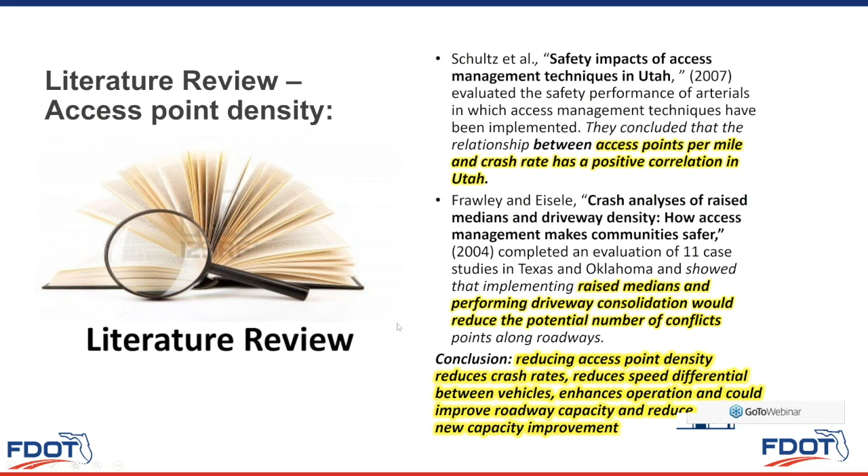Just want to show a couple of highlights. This is very wordy, but I'm just going to talk about the conclusion. If you reduce access point density, you will likely reduce the amount of crashes you have and also improve operations. And this is from the literature. So there's been a number of studies, including Florida. There's an NCHRP project that identified that of driveway crashes, about 70% of them are left turns. There you go. Raised medians reduce crash frequency and severity, and also improve traffic operations.

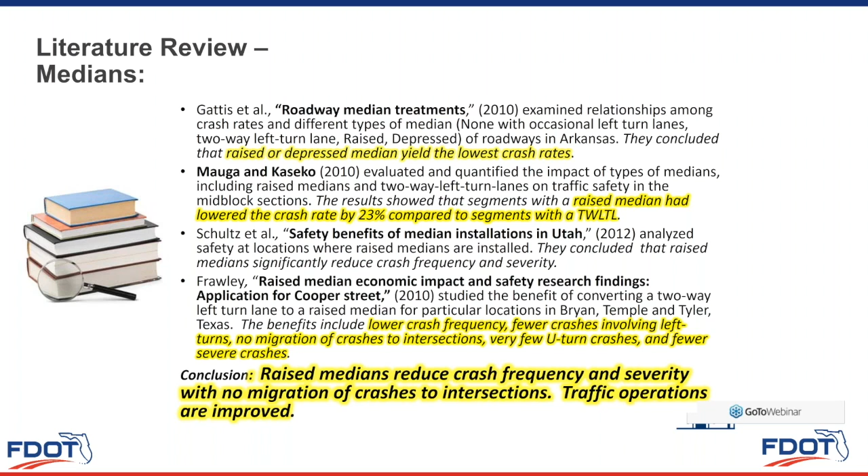There's this myth about economic impacts because of raised medians, and so we hired Mythbusters to take a look at this, and studies have shown that perceptions typically appear worse than reality. I think those types of businesses that have a lot more passerby trips may be affected more than those that have direct generation. And so, in general, though, this myth is busted. And in some cases, after a good streetscape project that includes medians, you might get more economic activity.

I want to talk about data collection. Actually, before I do this, I was going to pause my screen, but I'm just going to jump away, and I want to show you something. The presentation I've been showing you was from last year. I also gave a presentation this year, and I just wanted to very briefly show you a few things from it. Because Gary was mentioning that there might be some interest, it looks at right-in, right-out driveways, and specifically compliance issues. And we did a case study.

I'm skipping a bunch of slides, but we did a case study at a brand new Bojangles in Anderson, South Carolina. It all started when I went to the doctor's to get a mole removed, and I was sitting in the parking lot watching the activity in the brand new Bojangles next door, and I was amazed at the number of noncompliant or illegal maneuvers into and out of this driveway, which is supposed to be a right-in, right-out driveway. And this is the right-in, right-out driveway I'm talking about right here.

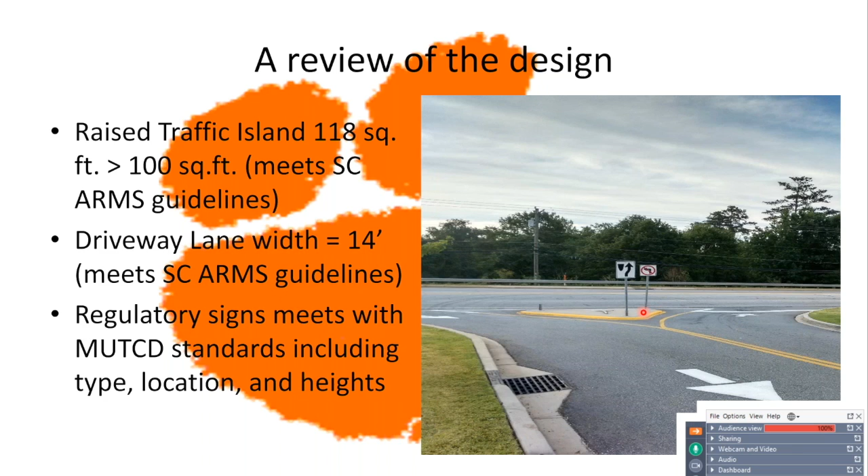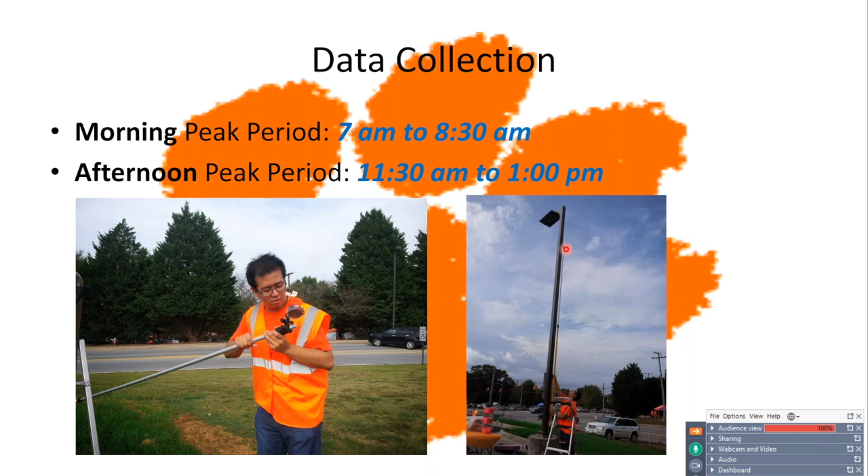And so we did some data collection, and we used these small action cameras, and this is actually a telescoping paint pole that we bought at Lowe's. And we put it up, and you could pan it simply by twisting it. And we use Wi-Fi to be able to see what it's recording. We use this to collect data.

Whoopsie, the pointer. Hold on. Oh, shoot.

Just want to briefly show the maneuvers. There's a left turn maneuver, a right turn maneuver. So I talked to a friend at the DOT in Access Management, and I said, hey, I'd like to do a before and after study if we put in longitudinal barrier, bollards basically, at this intersection. Would you help me with this? And he said sure.

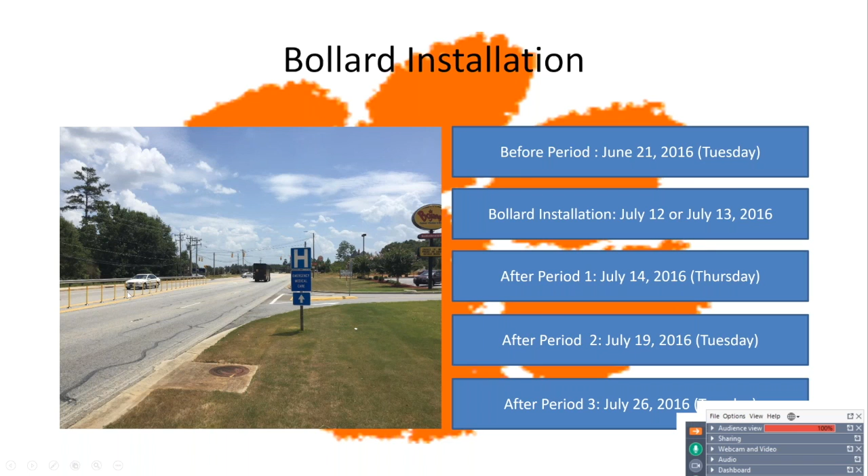And so we did the before study, and then the DOT installed bollards, and then we did three days of after data collection. And so here's our bollards. This is a very simple configuration here. I know down in Florida, I think a Qwick Kurb is popular in many locations. This is a cheaper system, but these ones are easily knocked away.

But what we saw was before the bollards were installed, we had nearly 20% non-compliance, and it reduced quite a bit after the bollards were installed. This is in a morning peak period. We also did a lunchtime peak, and again we found very similar results. We got inbound 20% non-compliance that went down a lot afterwards.

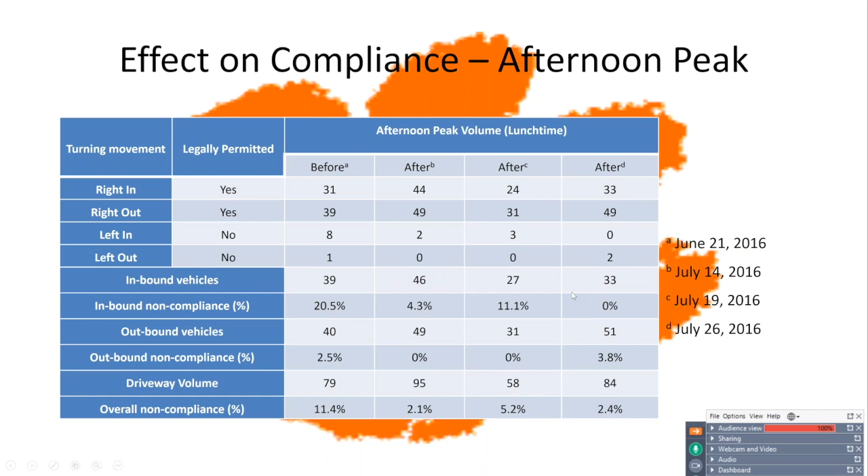We were interested in total volumes too. That's why we collected data at both driveways, and we saw that there was very little volume impact, and actually volume, for the most part, went up a few. It depends on the day of the week. And so from an economic impact, when considering just volumes, there was really no difference.

We did have some illegal maneuvers afterwards. This was considered an illegal maneuver: U-turn across the double yellow. And then we had three-point turns. We've had other things too, like vehicles traveling the wrong way here to make the left turn in. Not recommended. So I just wanted to quickly show you this study, and there's all sorts of data associated with this that we presented at TRB this year.

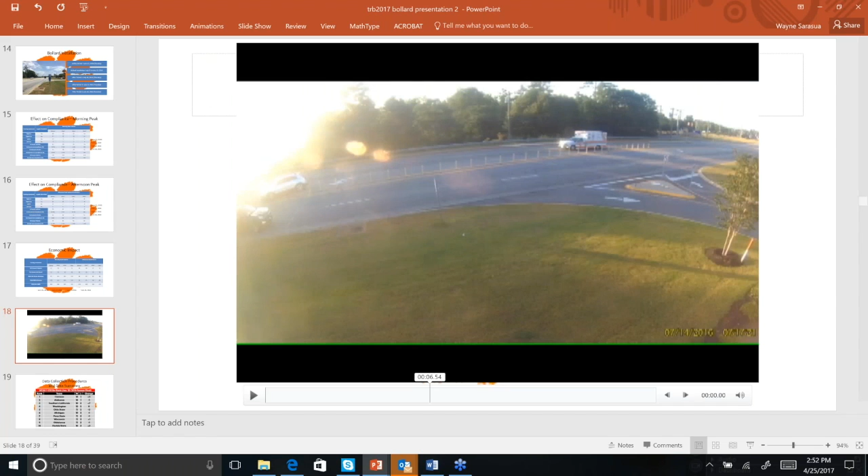I want to go back now to what we were doing on this other study, which has some related slides. Oopsie.

So we collected data along several corridors, 30 corridors in fact. We identified the corridors with the highest driveway crash rate according to a junction type driveway in the crash reports here in South Carolina. And so we identified 30 of them, and then I want to talk a little bit about crashes, the way we've collected crashes.

Once upon a time, we used distance to intersection, and then we migrated to a GPS system, that was used for a number of years and is still used by many jurisdictions, but no longer by the Highway Patrol. The way it worked was officers would use the handheld GPS, get coordinates, and then transfer the coordinate data to the crash reports. But officers had a lot of different problems with the GPS, and so many South Carolina crashes occur in the Atlantic Ocean, North Carolina, probably some in Florida, and other points unknown.

The new system was transitioned back in 2010, actually mostly 2011, and most of the Highway Patrol in the state had it by 2012. It's a GIS-based system. The officer can look on a GIS map to see where he or she is. The GPS will show where the officer is, and then the officer can pinpoint the location on the map by clicking.

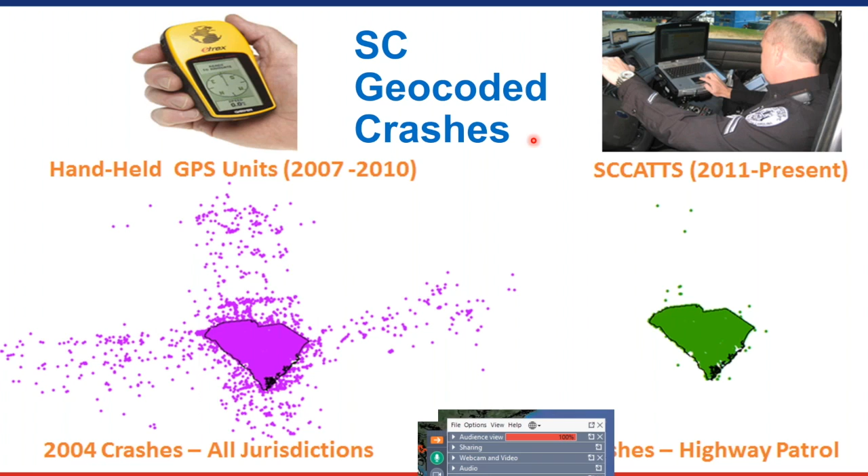Just a couple of things about the problems with handheld GPS data that I wanted to add. There's a lot of systematic issues. Officers would transpose longitude and latitude. The city of Greenville decided to change their GPSs to state plane coordinates without telling anybody, and so all their crashes were in state plane coordinates. And again, it goes in the same database, so we had to geocode theirs separately.

And then other jurisdictions had their GPSs in decimal degrees, while others had degrees, minutes, and seconds. And it's very tough to know which one is which, because in the database it just goes in as multiple digits, 6 digits for degrees, minutes, and seconds. Any number greater than 6 in the ones and the hundredths place, we know would be decimal degrees. But it was very difficult. You really had to use that data along with intersection locations to geocode them accurately. And you can see there's a number of other systematic errors that we had with the GPS handheld.

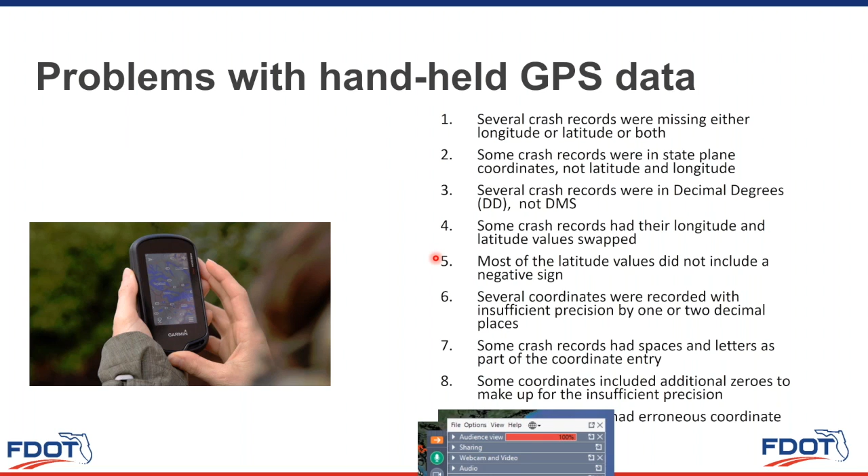Percent geocoded by year, and the data actually did not improve very much. We told the DOT all about this back in 2007. We wrote a paper that was presented at TRB in 2008, and the word just did not spread real well, and so many of the systematic errors continued until the implementation of the new system.

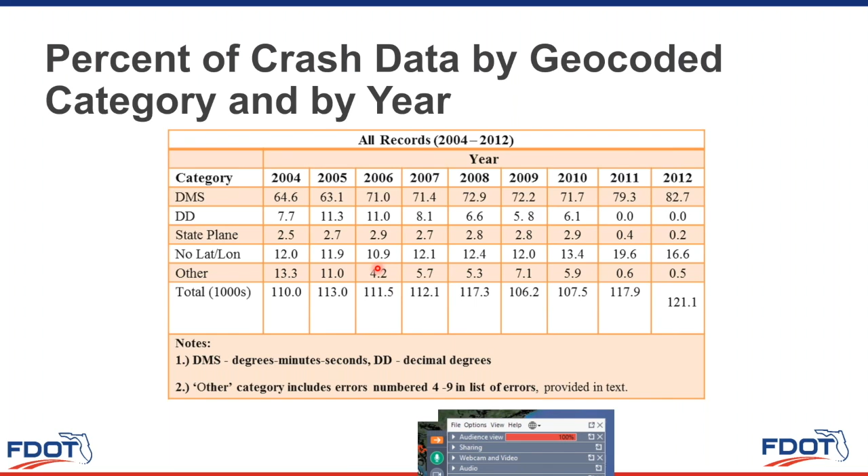Here, showing on the left, this is a busy corridor in Greenville, South Carolina, which is the closest big city to where I live. And here it shows that many of the crashes, now these crashes have been geocoded correctly. In other words, the officer would write down the correct coordinates. But even such, many of the crashes appear in parking lots and such, where officers would actually be filling out the report rather than on the road itself.

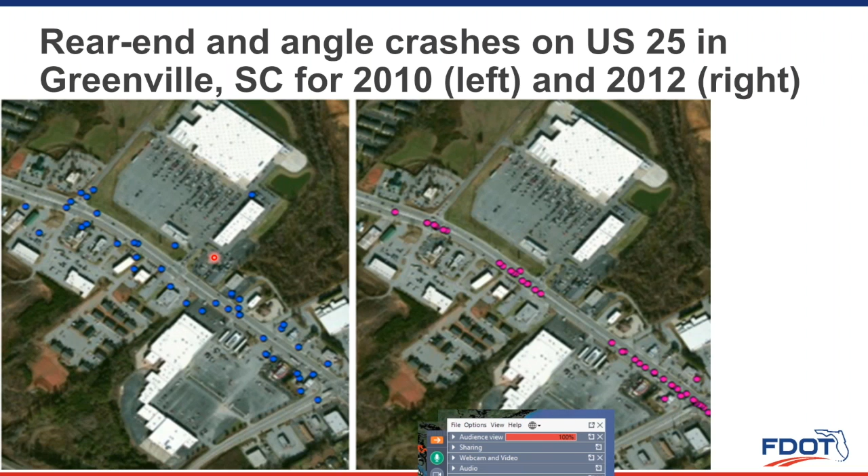On the right-hand side, here's the new system with the officers actually trying to pinpoint the location, and you can see the clusters, so this is great for statewide type screening, cluster analysis, whereas on the left-hand side, it's very, very random. I just want to show you a couple of other slides. On the left-hand side, there appears to be very few crashes in the road, and that's 2010 data. 2012 data, it's not that there's more crashes, it's just there's less crashes in parking lots and such.

This is US 17 in Berkeley. Again, you can see that we had many crashes appear in the parking lots, just much safer for the officers when they're filling out their reports to not be in the highway. And then they don't want to walk out there when they're collecting the GPS coordinates.

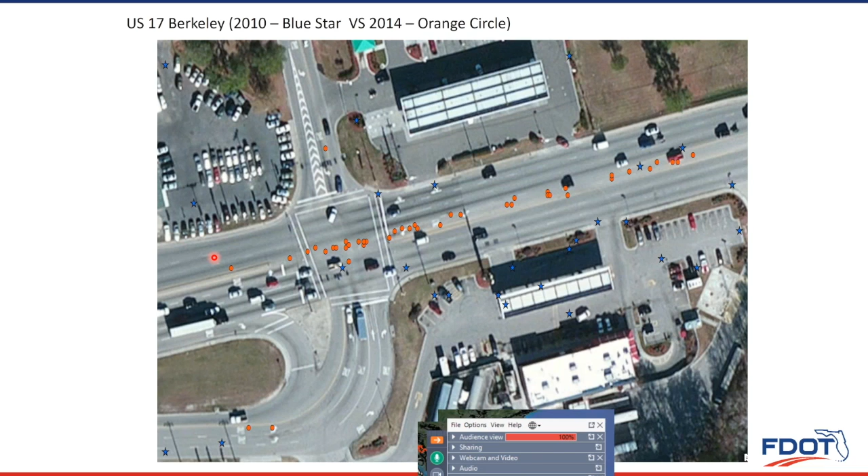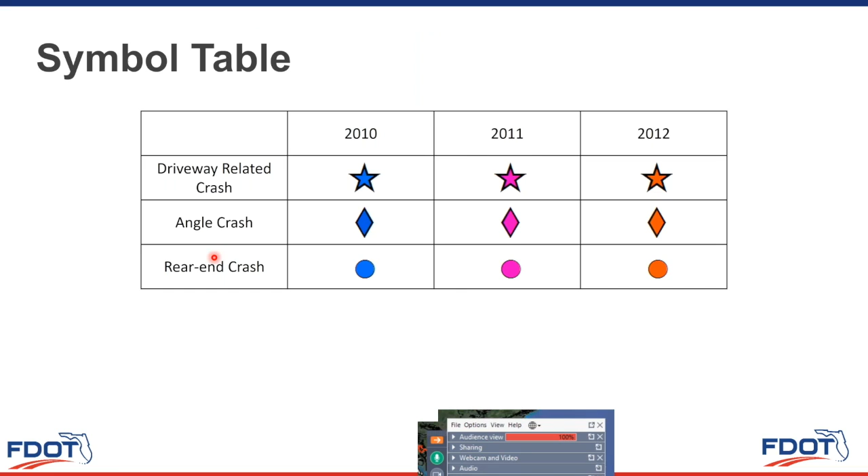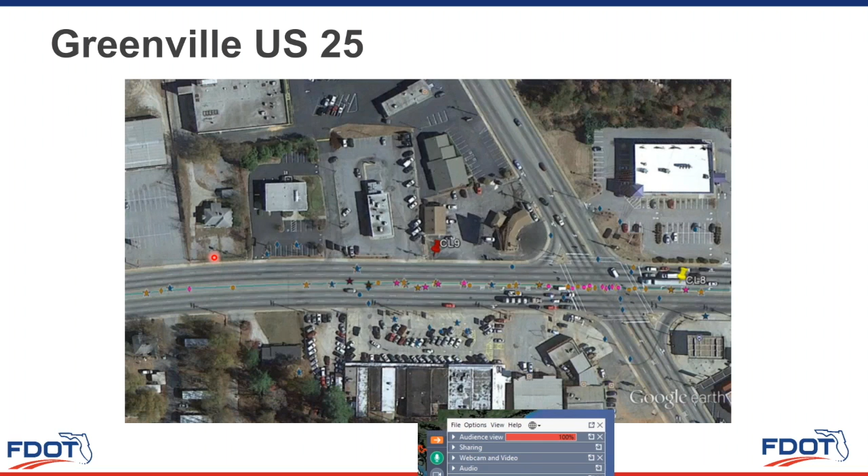I want to take a closer look at some data around the state. So some symbology here: 2010 is in blue, 11 is in magenta, and 12 is in Clemson orange. In Greenville, US 25 again. Just want to show, looking at crashes, we have a lot of crashes that occur next to left turn bays where we don't have really good corner clearance, and so a lot of vehicles are turning across the left turn bays into driveways.

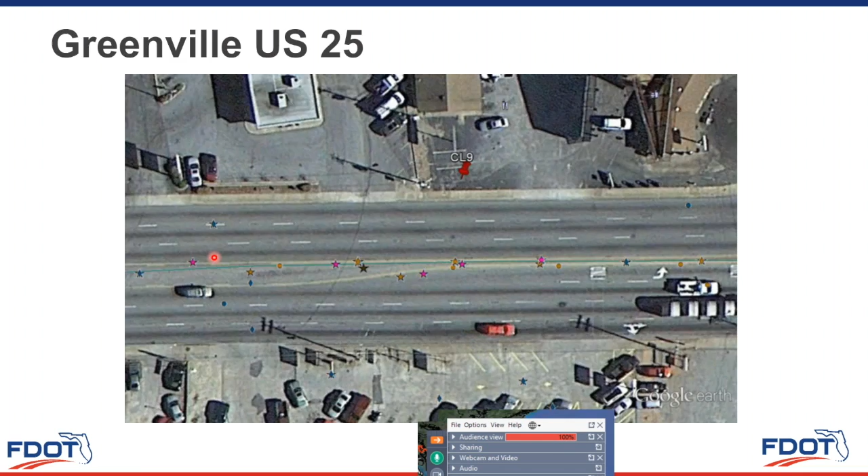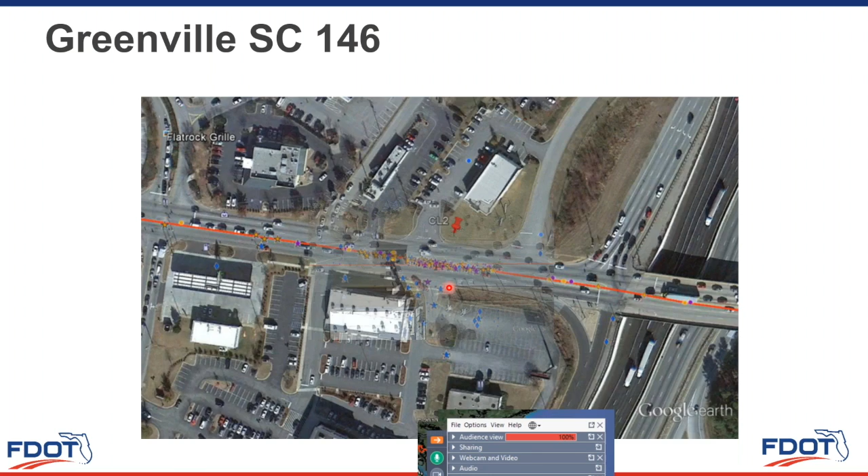Greenville, South Carolina 146. This is Woodruff Road, and this right here is Hell's Kitchen. This is 385 near Greenville. This is kind of a shortcut to 26 that goes to Columbia. And you see here, we just have a whole cluster of driveways with poor corner clearance, very close to the ramp here, and we just have a tremendous amount of crashes. And just kind of a zoom in. Again, this is only 11 and 12 data here, and 10 data is again in the parking lots.

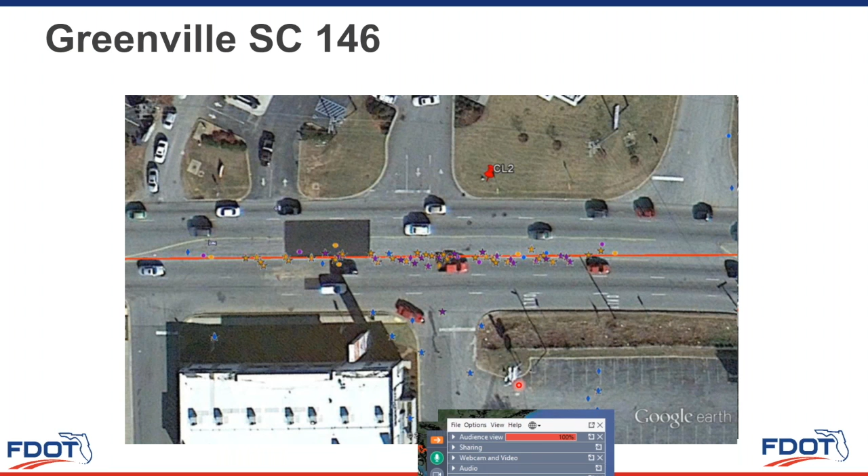Just moving down the road from this, where we go into a shared driveway and an intersection, the crashes just seem to disappear. Again, much better corner clearance, and a busy signalized intersection, but much fewer crashes. And the crashes I'm showing here are a number of different junction types, including different crash types, not just driveway junction types.

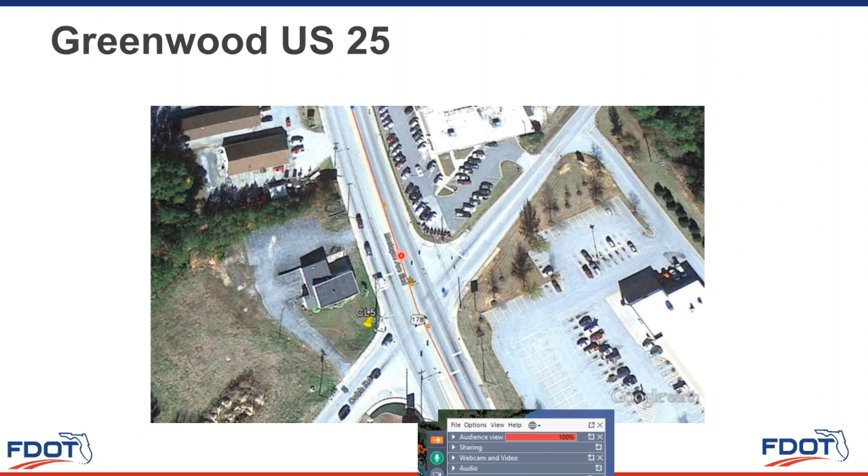Greenwood, US 25. It just kind of jumped out at me that we had 2012 crash data, but not 11 and 10. I was wondering why. And taking a closer look, they recently built a Dollar General where maybe the corner clearance might not be the best.

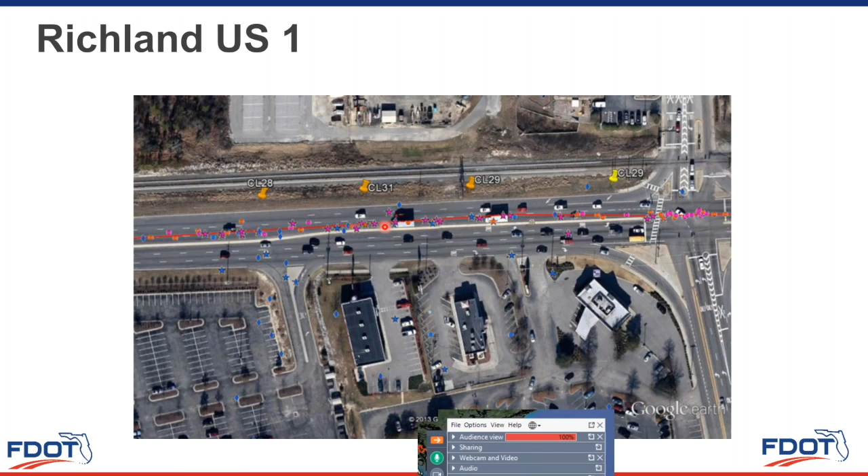Richland, US 1. If you take a look here, you'll see very little orange, and so much fewer 2012 crashes. And it just so happens that in the end of November, I believe, of 2011, they added a median. They did a before and after, and they created this collision diagram. By zooming in here, you can see crash type. We have 1 here, and we have 3 here. So these are angle left turns into the driveways. And see, there's so many of them, they're not even putting them on the sheet.

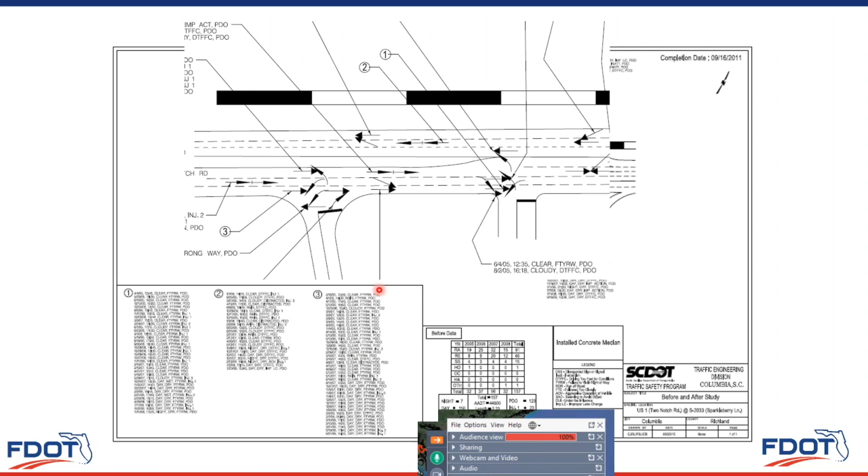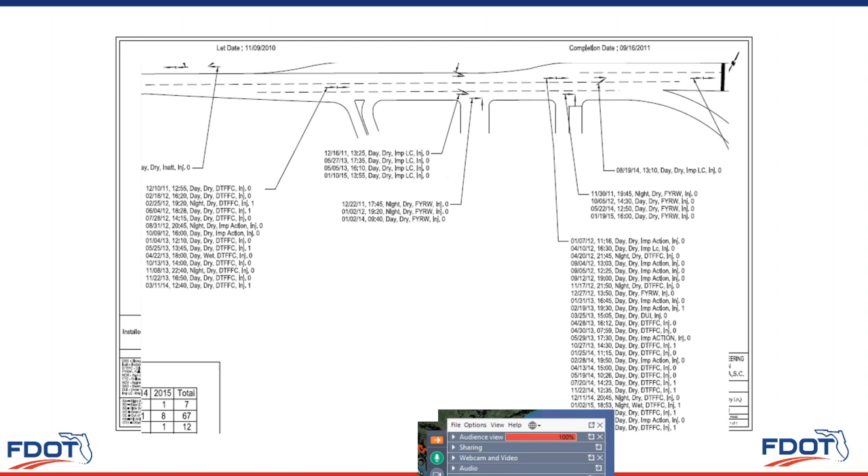This is the after scenario. And we have a lot more rear end crashes, but very few or none, close to 0, angle crashes after this. And so here's our before data on the left. This is a 4-year period. And the after data, roughly a 4-year period also. And the numbers almost cut in half. And the types of crashes, very few angled. There appears to be more rear end crashes now than there were before. But overall, fewer injuries and definitely enhanced safety.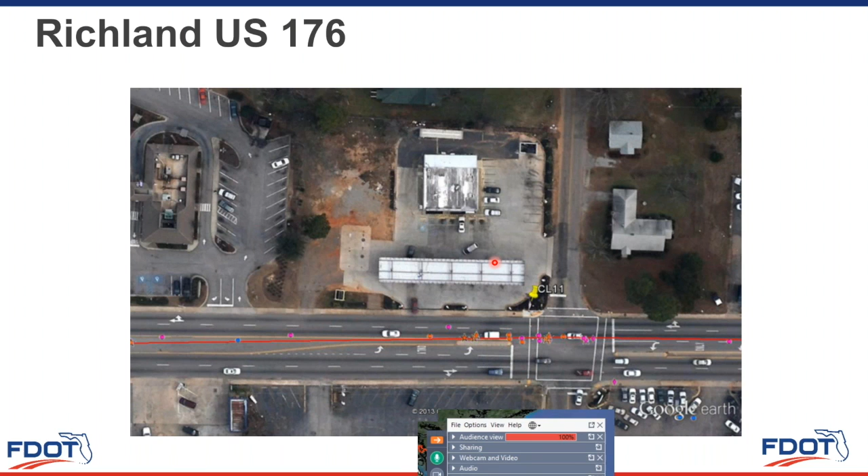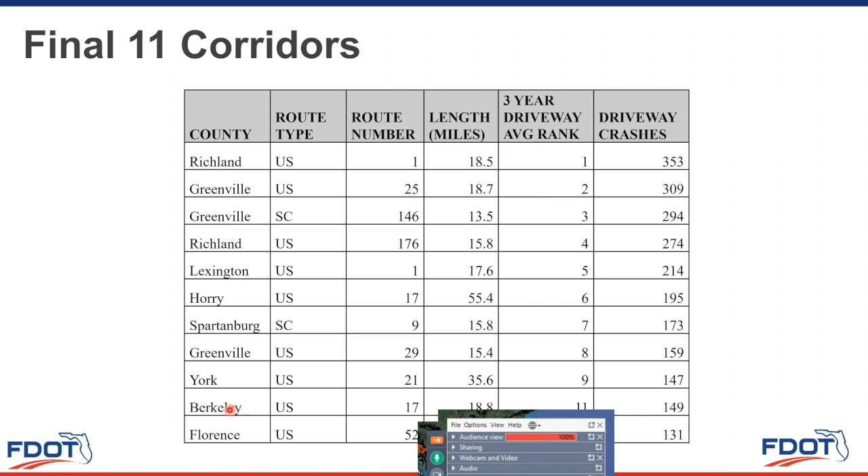So from those 30, we actually selected 11 from around the state for further analysis. And the 11 are most of the top ranked. We substituted a few to give us better spatial resolution. And so we added, but they're all in the top 14 or so. And these are the top 14 corridors with the most driveway crashes in the state.

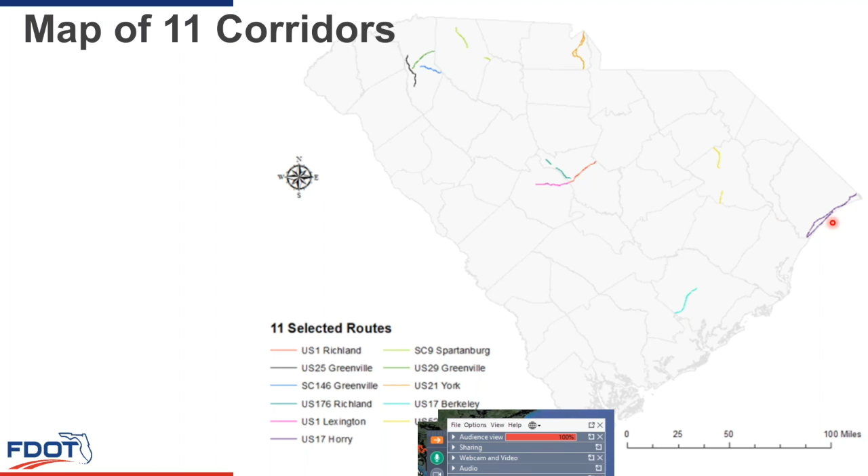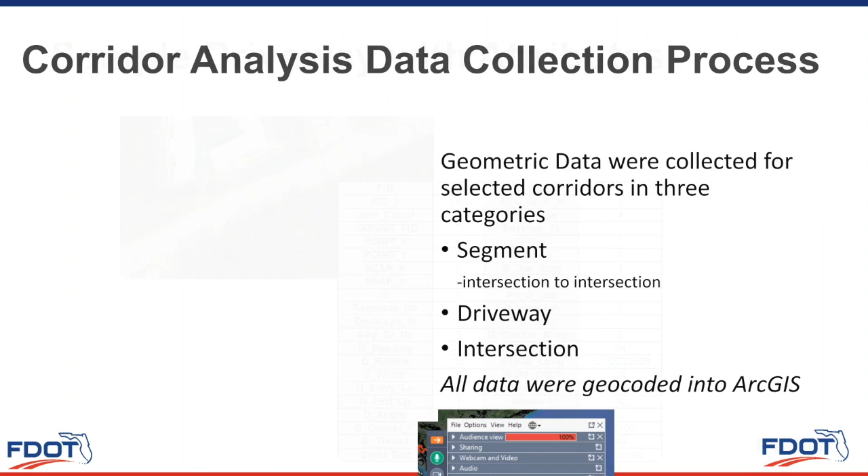So we collected data. Actually, a lot of the data came from our road characteristics file called RIMS here in South Carolina. Segment data, driveway. We don't really have much driveway information, very little, but we do have some intersection information, or at least the intersection locations. We also, though, created a driveway database because, again, what we're talking about is crashes associated with driveways, or what our purpose is in this study.

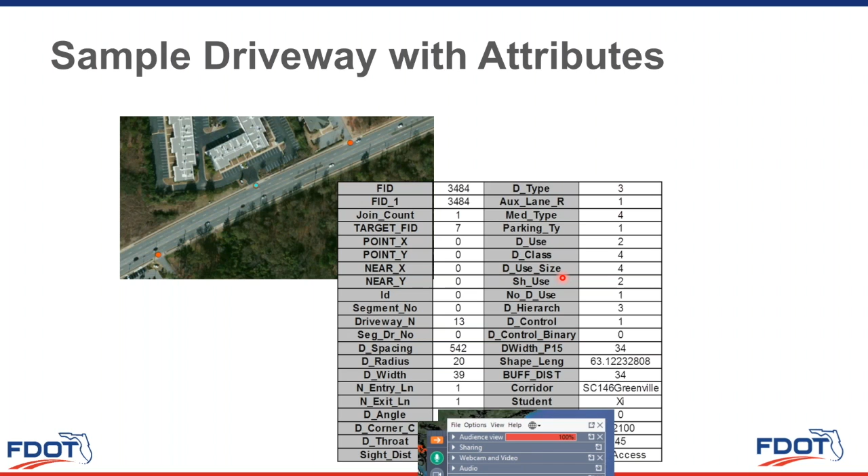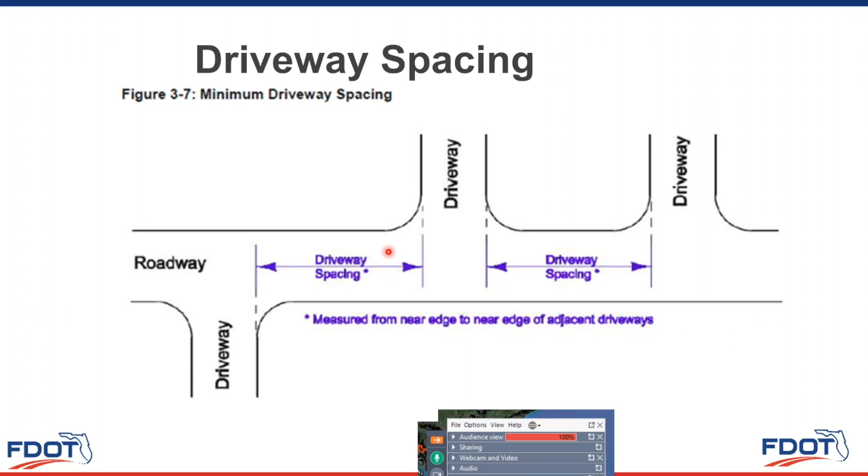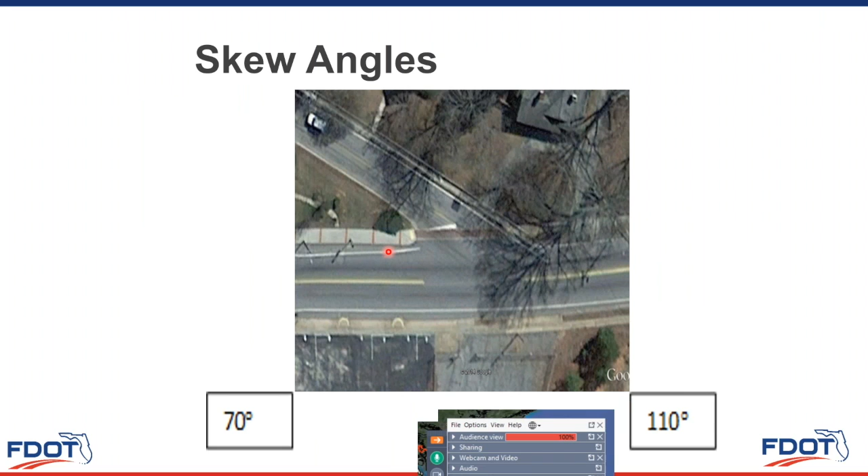So we collected all sorts of attributes. I hired a bunch of students from high school and some undergraduates a few summers ago to populate the databases. We gave them cheat sheets showing, okay, here's how you measure driveway spacing. And everything was done with Bing Maps, Google Earth Maps, and also Street View. And we populated this database, and we had a database of about 8,000 driveways along these corridors. We had, again, cheat sheets showing them what the skew angle was. Then after collecting all this data, we did safety analysis.

And so one of the things that we wanted to do was associate crashes with driveways. Now, I know you all down there probably have junction type as well. And we do have in our crash reports a junction type that is driveway. However, it's very clear that the officers were not necessarily populating this field the same. And in many cases, they omitted populating it altogether. And so there were probably a number of driveway crashes, in fact we were sure of it, that were omitted. So we included the driveway crashes, but also we included your rear end crashes, your angle crashes, your head-on. We removed basically fixed object crashes and single vehicle crashes from the analysis.

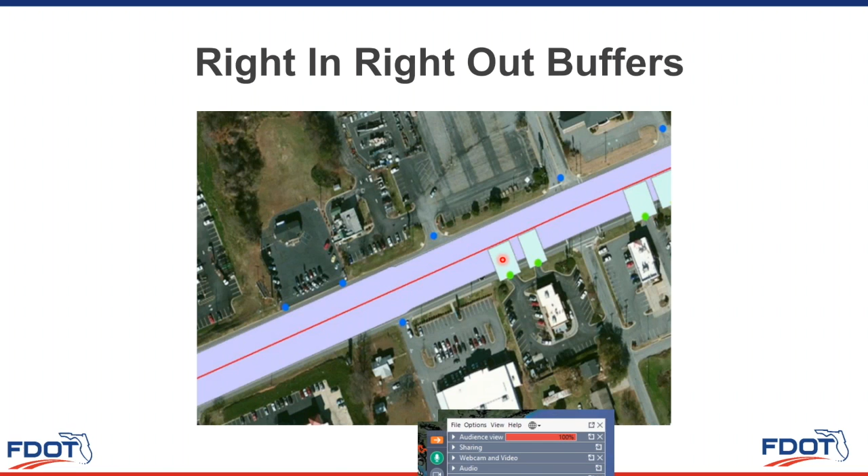Then what we did was we created buffers. What we have here in South Carolina is a center line, but we do not have a buffer for the pavement. So we created one using the RIMS data, which has travelway distance. And we used a GIS system that offset from the center line to create this travelway buffer. And then combined with another, we created an algorithm to create buffers around driveways. And we had right in, right out buffers that go halfway across, and they also go some distance to the left and to the right of the driveway based on another analysis we did. And then we had full access buffers that go all the way across.

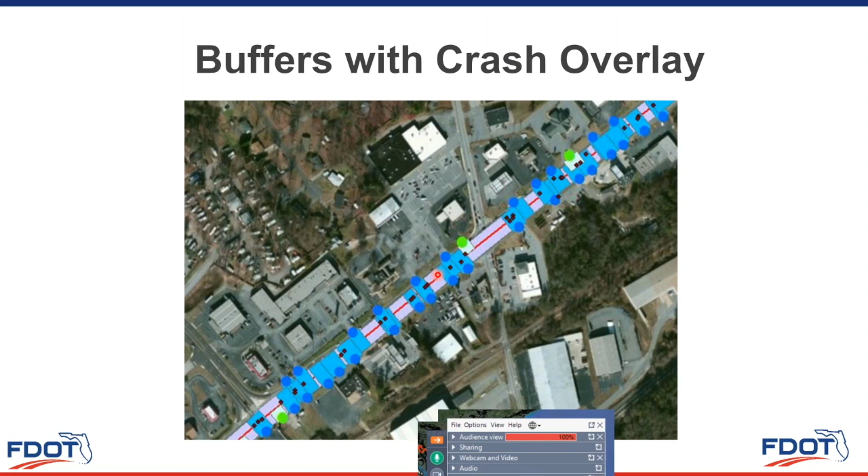So now that we have crashes associated with driveways, we can do some summary statistics. So here's just an example, crash rate by driveway class. And this is just raw numbers, straight number of crashes. There's no other context here, like, for example, ADT and other things. But it shows that the higher turnover, like fast food and gas stations, would have a much higher crash rate. This is big box over here. And then over here, single-family dwelling units, a much lower crash rate in those driveways along these corridors.

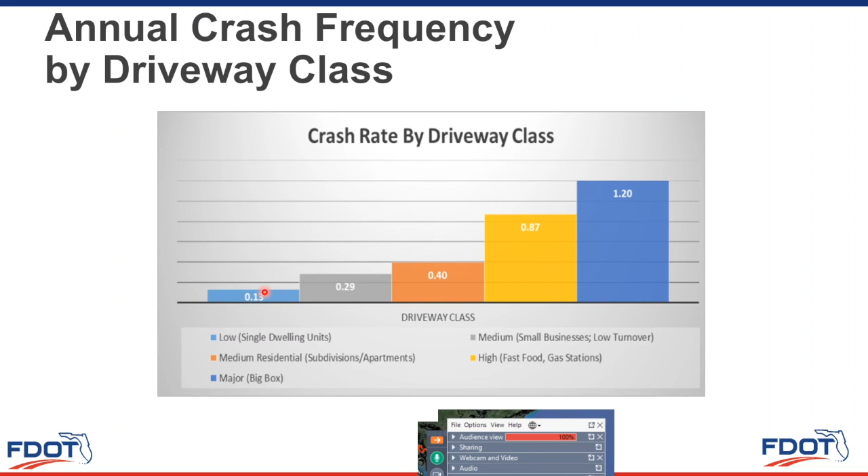Full access versus right in, right out. Full access had, in most cases, more than double the crash rate of right in, right out. And this is for different land uses, overall versus higher turnover and mid and low turnover.

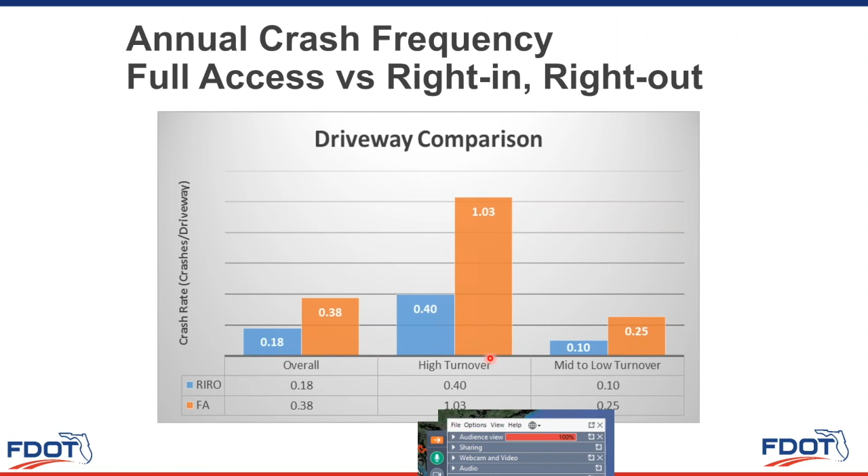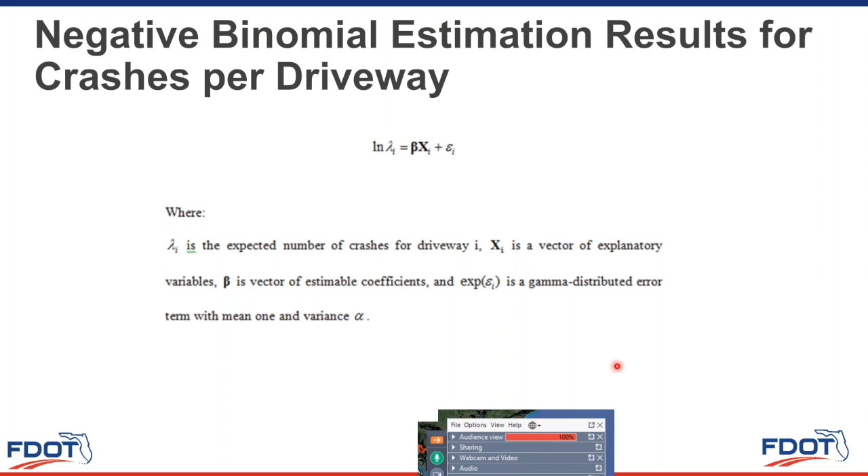Now, that's all well and good, but to really isolate the contribution of what the right in, right out would be as compared to other things like ADT and other characteristics, we need to do a statistical analysis. And I'm going to skip over all the discussion on statistical analysis, but once you run this analysis, you get estimates, and the negative ones show that these variables are negatively correlated with crashes, and the positive numbers show that, for example, driveway class, the higher the classification, those are more highly correlated with crashes.

So an increase in the classification, or the increase in speed, the increase in ADT is correlated with a higher number of crashes. Going from a full access to right in, right out, you can see that there is a negative correlation. Crashes would go down. Using the statistics, we can create crash modification factors.

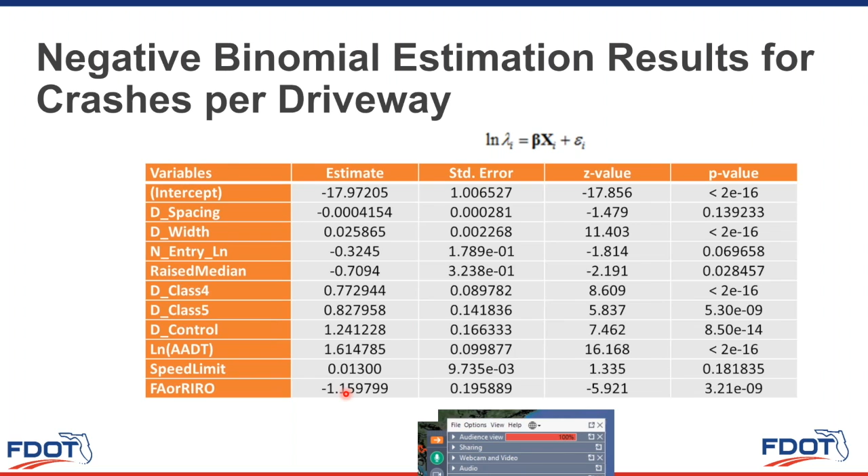And so for those of you who are familiar with the Highway Safety Manual, there is methodology in there and online and in literature for the use of crash modification factors and crash reduction factors. And so it shows here that if you convert to a right in, right out driveway, you reduce crashes by 69% at the driveway locations.

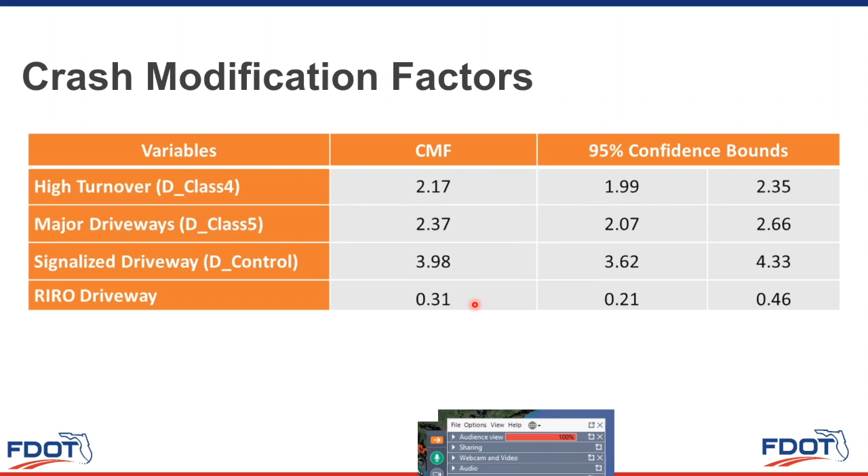Now this does not show the change at an intersection. So for example, with right in, right out driveways, there may be more U-turns and more activity at the intersections. But at the driveways themselves, the crash rate is shown to drop tremendously. There are other crash modification factors, driveway spacing. So as you increase driveway spacing, the crashes go down.

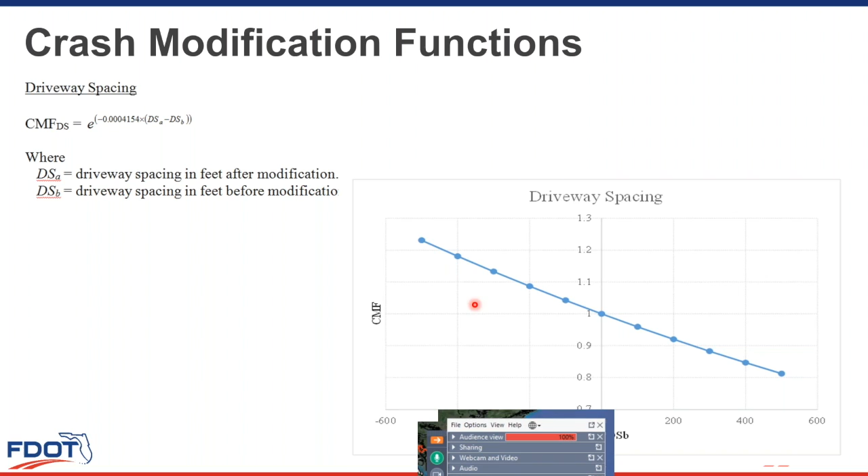Driveway width. This is kind of interesting, that we found that if you increase your driveway width beyond 24 feet, crashes tend to go up. And I think this is because you're not channelizing traffic so much. And so if you let drivers do what they want coming into a driveway, that may lead to more crashes. So channelizing drivers is probably a good idea.

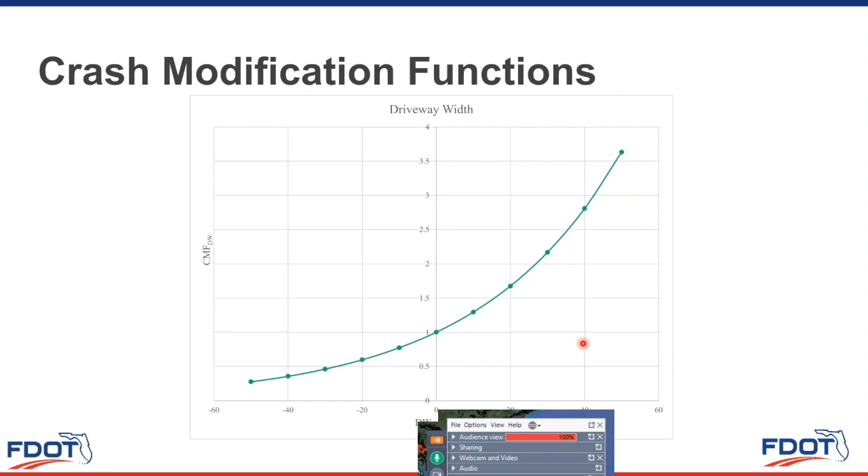Other things, the number of entry lanes. It was kind of interesting that increasing the number of entry lanes from 1 to 2 actually showed that crashes would go down. And we had a lot of discussion and argument about this with DOT folks here. But I had some thoughts about it: if 2 vehicles can turn in at the same time from opposing directions, they may not conflict with each other if they have their own lanes.

Also, if you do have 2 lanes and you're trying to make a right turn, you may have a little bit more space where you can zip in and not get rear-ended. And so there were just some ideas there. You can make your own conclusion. We were just showing the data.

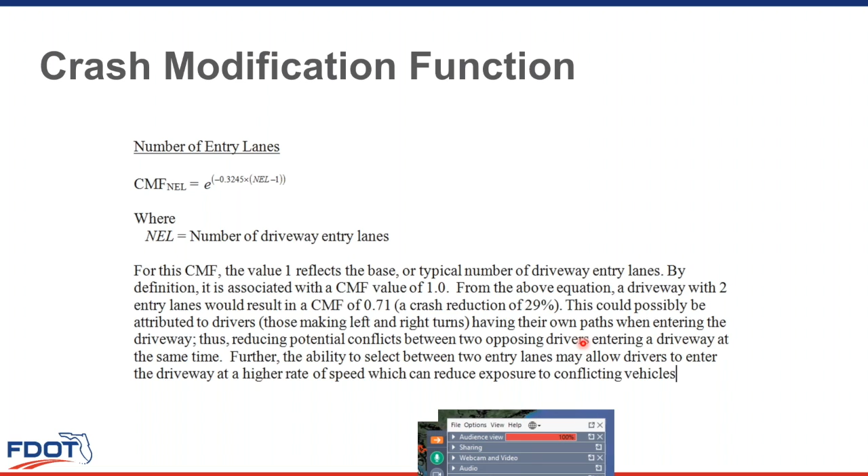Crash modification functions rather than just discrete variables. As AADT goes up, crashes tended to go up. And this particular function is based on the roadway volumes that we saw in these corridors, mostly around 20,000 per day, and so this is where this function would apply. But it shows that, for example, if you increased your volume from 20,000 to 25,000, an increase of 5,000, your crash modification function would show an increase of about 1.5 times, or an increase in crashes of about 51%.

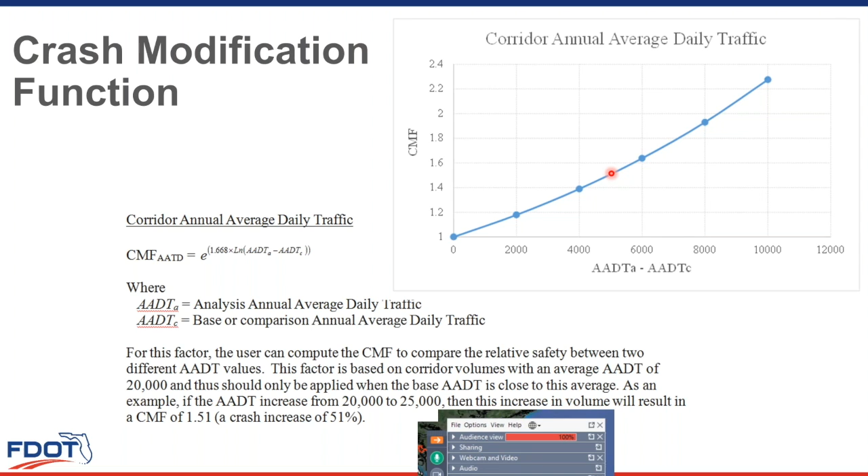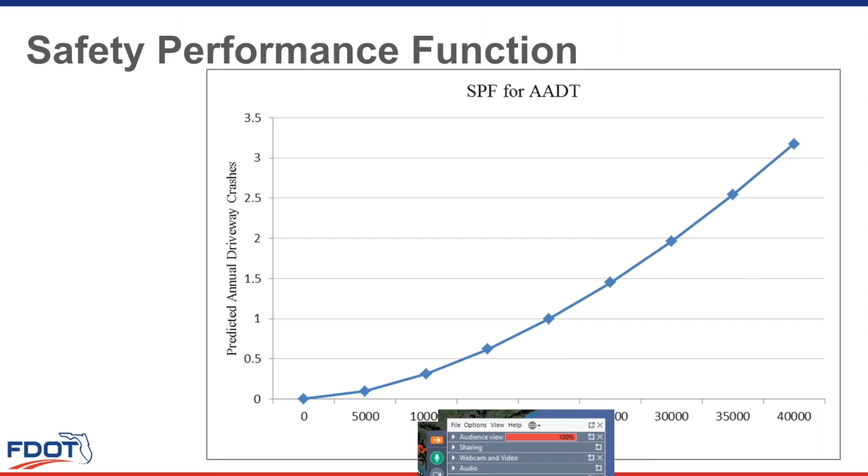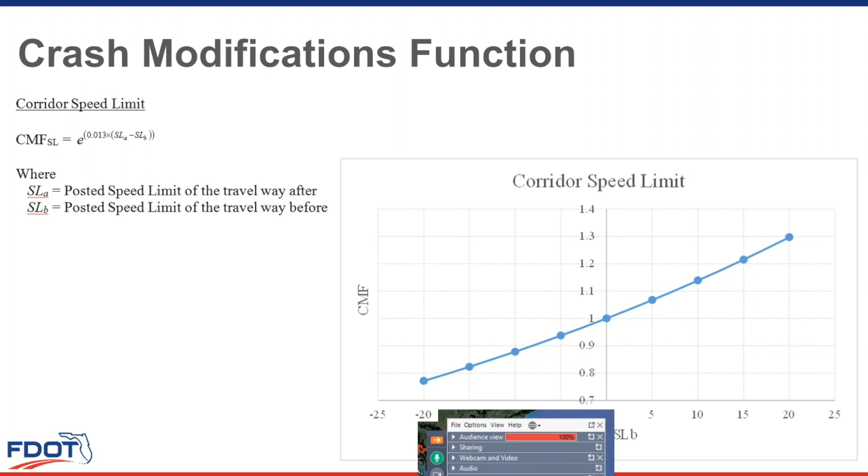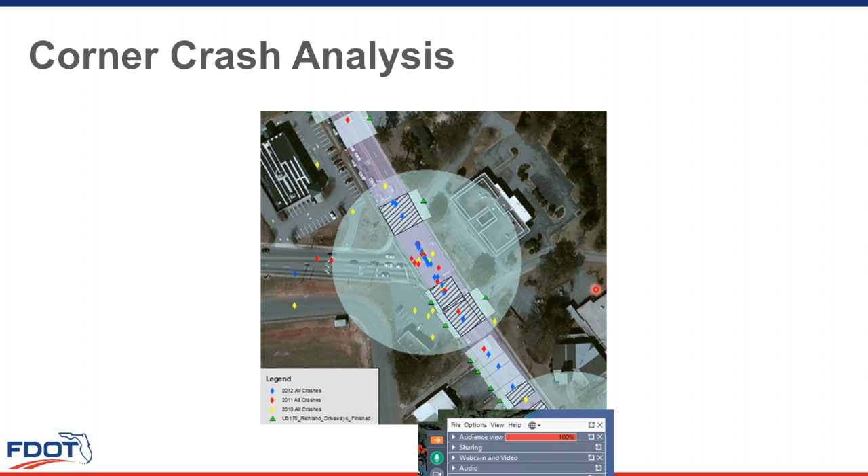And then I just want to mention corner clearance, because corner clearance is a big thing here in South Carolina. We are very, very lenient in granting waivers to allow driveways within, say, 150 feet of intersections, where we're supposed to avoid that depending on what the volumes are. And if we look here at the corner clearance data, you see that between 0 and 150 feet versus 150 and 300, there's a lot more driveways, and they're not supposed to be there. They're supposed to be further away.

Obviously, businesses want access and they have the right of access to their land, but just having it on the main line can lead to safety issues. And if we show here, this is 2012 crashes, 0 to 150 feet from the intersection for these very busy corridors, in terms of number of driveway crashes per year. And then it goes down tremendously between 150 to 300 feet. And if we look at the frequency, you can see that the frequency cuts in half, or almost a third here on US 25, but definitely goes down in most cases.

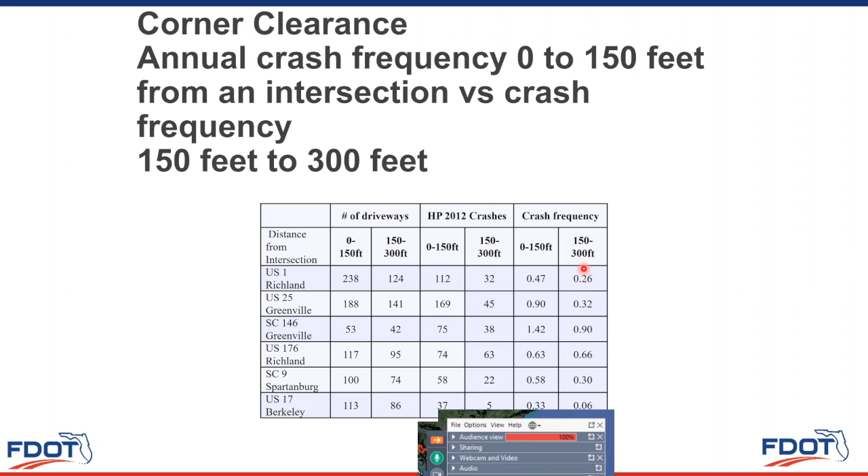There are other project components. We did a waiver analysis. We did some operational analysis and some economic analysis as well. But the big thing that came out of this was recommendations to the SCDOT ARMS manual. This is the access management guidelines that SCDOT uses, and it's available to any developers.

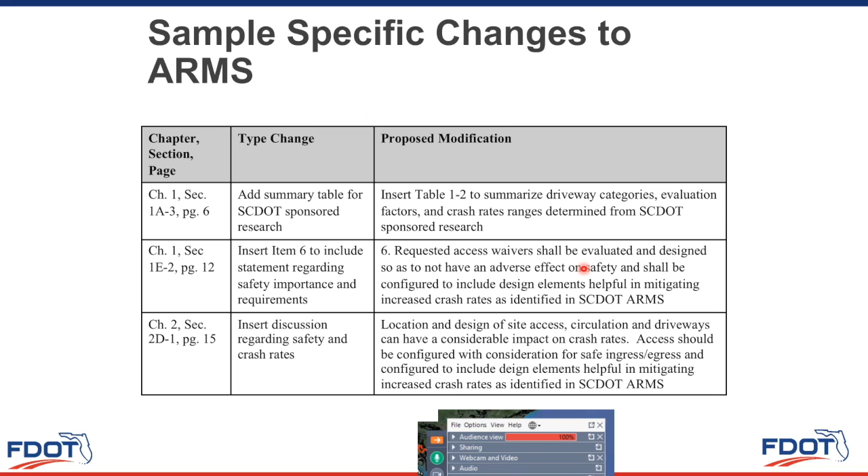And so there's some sample changes. We made a bunch of recommendations for changes, and there's a bunch more. I just didn't want to go through them, but I want to just spend the last moment here talking about what we found.

And the biggie is that the standards that are out there, what we use here in South Carolina, are very similar to national standards. They pulled them from national standards for the most part. And we just made some recommendations. So the standards aren't the problem. The problem is the waiver process. And we're very lenient on waivers.

And so one of the things that the DOT wanted was facts, to bring back to the businesses and the developers to say, hey, we have data that shows, from a safety standpoint and even operational standpoint, what that driveway will do. And so trying to give the DOT ammo to say no, or to say you need to redesign it. And so anyway, that was the biggie.

Other things, the driveway database that we developed was awesome. It was really big. Few states have a driveway database. Some states are getting more and more into LiDAR. Utah is crazy about updating their attribute databases every so many years, and so they do have a driveway database. But we saw that very few have any sort of data about driveways.

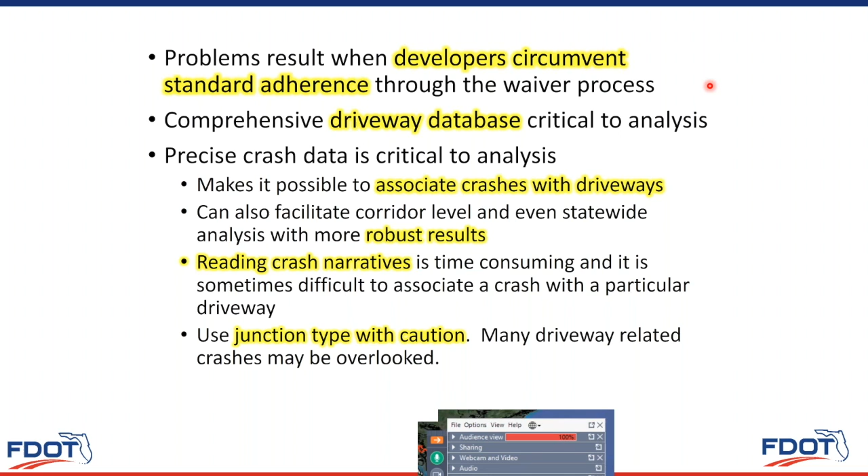Other findings, medians are great in terms of lowering crash rates. Crash modification factor, will lower crashes by at least 50% is what we've seen. Right-in, right-out driveways are great because they eliminate conflict points. Again, they can reduce crashes by more than 50%.

I just want to mention though about right-in, right-out driveways. When we did our analysis this year, we used right-in, right-out driveways from the standpoint of medians and then also other types of right-in, right-out driveways. For example, a raised pork chop island without any sort of centerline barrier or delineator, and then other types which are just painted islands, some signage and things like that.

And the crash rates are definitely higher for those types of right-in, right-out driveways than those that have some sort of physical barrier. And bollards are an inexpensive way to act as a delineator, though they do have to be maintained. Down in Florida, though, I think you all use a lot of Qwick Kurb, and Qwick Kurb is definitely better than just simple bollards. And the maintenance I think is probably better.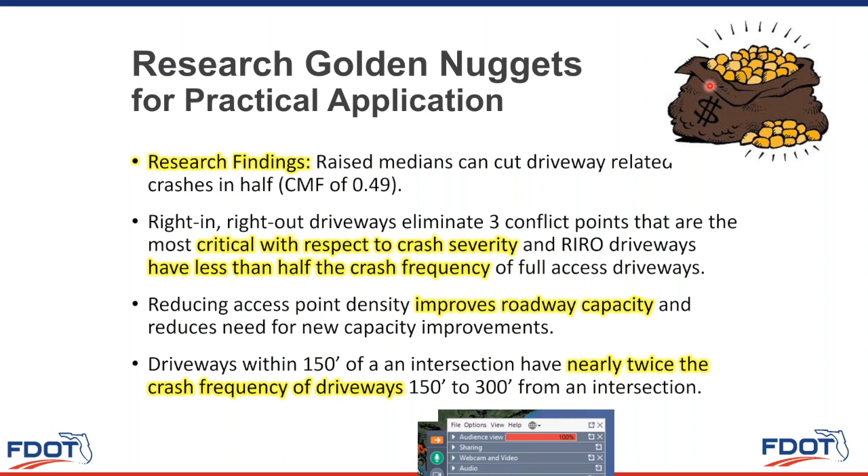Other things, better access policies result in a lower number of crashes and also lower crash severity. The waivers, we talked about waivers, they can be an issue. And then high turnover land uses have a much higher crash frequency. Definitely encourage shared driveways, things of that nature, to help reduce the conflicts.